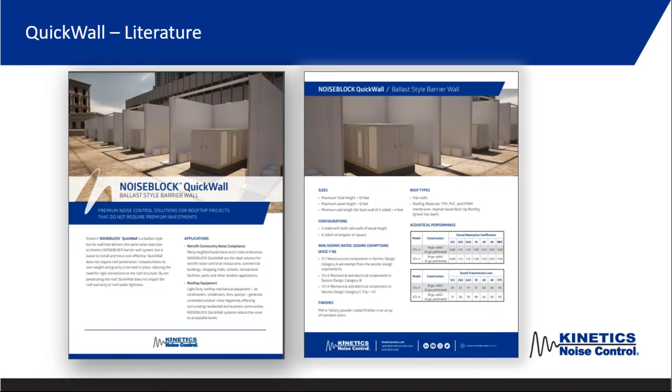So these are some screenshots from the video, some renderings of a project that we have planned to do. And you'll see there's a number of three-sided Noise Block barrier wall systems around some rooftop equipment, air handlers, light duty equipment. And there's some windows in the back here in an office building. So they're worried about the noise projecting from these units to that office building.

Now, we can do both three-sided systems or four-sided barrier wall systems. We're showing a three-sided here just so you can see what's going on inside, okay? We open up this wall here so you can see what's going on. So it is available in four-walled systems or three-walled systems. You'll see here the common components of a Noise Block barrier wall system.

You have your base plate plus column welded assembly. You have your 4-inch thick Noise Block wall panels, usually perforated inner shell for sound absorption and solid outer shell for sound blocking. So you get that composite noise reduction offered by the absorption and sound blocking. The only thing different here is you're going to see something low at the bottom, these little boxes. And that's where we talk about the ballast of a system.

So just looking at the QuickWall ballast, well, what is a ballast? A ballast is basically a heavy material placed low on a subject to improve its stability. And that's what we're doing here. As we said, you have your Noise Block panels, your structural steel. This is an example of a three-sided system, of course. And then you have your ballasts down here, which are basically weights.

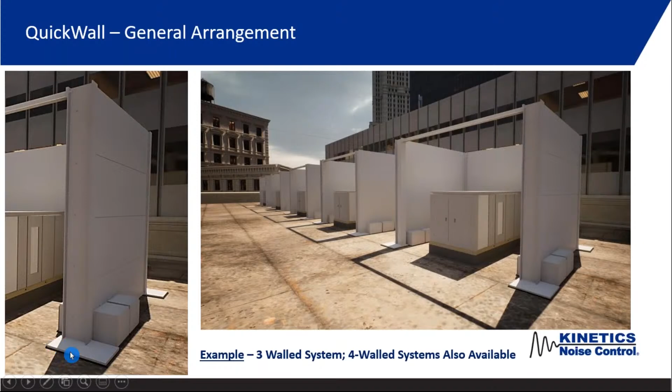We're going to determine how much force is there, how we have to overcome those forces, how many weights we need, and what is really feasible to be taken up, because this is also going to be weight on the roof. But the key here is, going to the previous slide, if you look here, there's no anchor bolts. So this is not rigidly attached to the roof structure. And that's the key here and what's going to reduce the costs.

When I talk about applications for this QuickWall product, I put in the right corner here, retrofit and new construction. The initial benefit is in retrofit applications, where there is equipment up on a roof. There's no problem, it's new construction. A year later, maybe somebody moves in next door and now there's a noise issue at the property line and we have to quiet this down. So just keep that in your mind from a retrofit perspective.

A lot of this presentation, some of the comments, features, and benefits, are going to be a function of being retrofit. Also, we can use it for new construction though. And once again, this is all for community noise compliance, rooftop systems, where it could be a restaurant, commercial buildings, schools, worship centers, anywhere where there could be an outdoor noise issue, and also for rooftop equipment, air conditioners, condensers, fans, pumps, anything making noise.

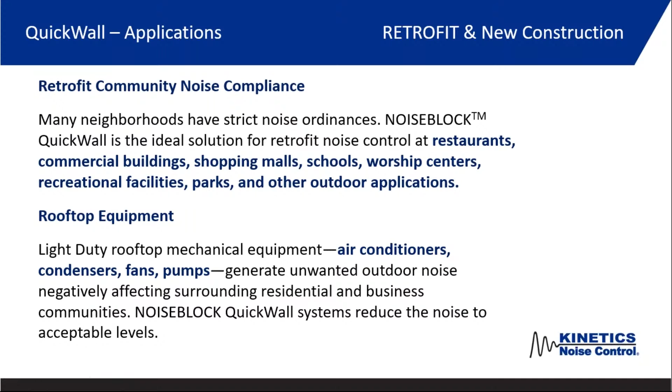So why is there... Hey John, we have a couple questions. Oh, I'm sorry. Great. Yeah, we didn't mention about questions at the end. So let's go ahead and answer them as we go.

That's great. Okay. Yeah, so the first question is, can we do one-side or two-side wall systems? Right now, we're doing three-sided and four-sided wall systems. We are looking at one and two-sided wall systems, and they should be able to be done. But right now, most of them have been three or four-sided. So I'd say the answer is yes, but we would want to look at the application.

Now, why is not rigidly connecting this to the roof a benefit? Well, one reason is, remember we were talking about retrofit. Maybe the equipment is already there, and we have a noise issue. We have an existing roof. We're going to eliminate the need for these roof penetrations using this system. So now we don't have to worry about any water leakages in the future. We don't have to worry about having to get under the existing roof to access if we have to rigidly tie a column into the system.

So those are all very important things and benefits of this. The other thing is it's not going to void a roof warranty. It's not going to interfere with the roof warranty. There's also shorter permitting processes when compared to systems rigidly attached to a roof structure. There's quicker installation. And then the other thing is, although we want all contractors to be very busy all the time, this actually would reduce the need for multiple contractors.

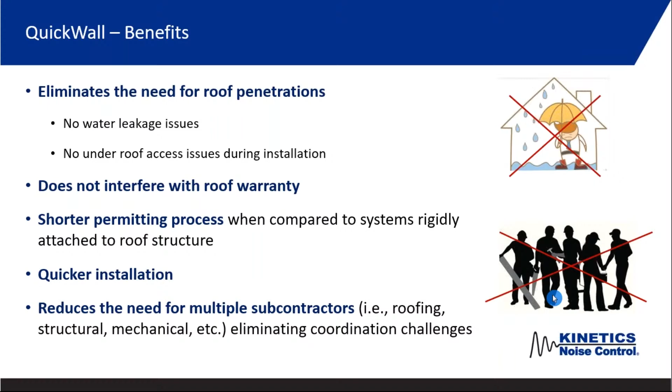If you don't have to penetrate the roof, we don't need a roofing contractor. If you don't need to rigidly tie to the existing roof structure, we don't need a structural contractor for this. We might not need a mechanical contractor, or we may only need a mechanical contractor. So now we're eliminating all these coordination challenges as well. So those are some very upfront benefits to this system, which basically floats on the roof. It's not rigidly connected.

QuickWall cost impacts. So what I mentioned on here is the initial cost is about the same for our standard noise block system. So our noise block system with structural steel base plate upward, you have our panels, you may have doors, you may have acoustic louvers. There's a lot of things that can also be installed in this as well. That system holds true in the same price. There's a little added cost due to the price of the ballast, because we're going to have to add these counterweights, if you want to call them, these ballasts to the system.

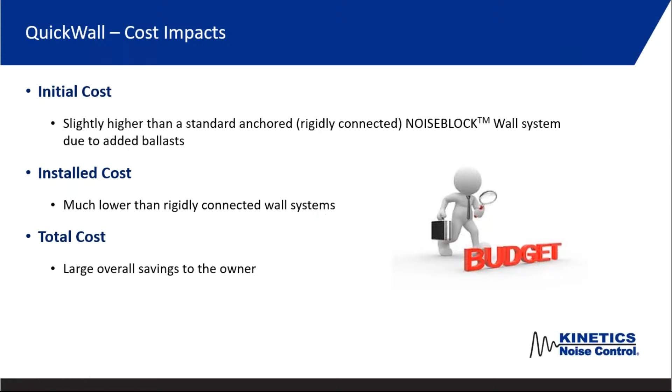So the initial cost might be slightly higher, but the installed costs are much lower than a rigidly connected system for a lot of the reasons, where we don't have to penetrate the roof, we don't need multiple contractors, we don't need to tie into the roof structure. So the total cost when you combine the two, there's a large overall savings to the owner, and that's what's really important with this.

Now, is this system applicable for all applications? The initial answer and the easy answer is no, not all applications would this be applicable to, but for many it is. And when we design this, there's a lot of things that are considered. One is we want to design it to resist any tipping due to wind forces and uplift forces, and the lateral movement, it skidding across the roof, right? And so we want to look at how many ballasts are needed, how much weight is needed to counteract those forces as they're designed into the system and the resulting forces. The added weight also provides additional friction.

And since there's no rigid support at the base plate, we also have a pad underneath that base plate as well. And so that's to protect the roof, and also keep these datum points, these heights of the ballast and the bottom of the base plates, at the same elevation.

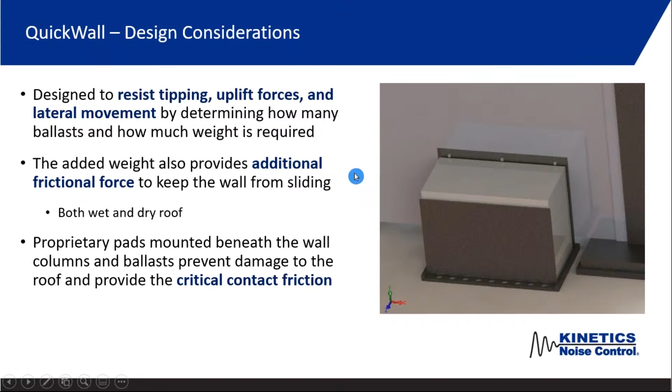But what we do is we counteract those forces. The pads are proprietary to give us a critical contact friction. And the other thing is that this is good for both wet and dry roof systems. So these are things we look at, because those are tests we have run in-house so that we have that all taken care of.

Would Kinetics provide all the components of the system, including structural steel and engineering? Yes, and that'll be in a deliverable slide that we have at the end, but correct. Kinetics would design everything from base plate upward, including the ballasts and the proprietary friction pads, whether this is powder coated or not, all the bolts, nuts, washers to hold the panels in place to the structural steel. So everything is connected together in one complete package, almost like an erector set. And that's the nice thing of this. There's no field welding, nothing like that.

Anything else? Would the weight of these ballasts introduce the need for modification to existing roof structure to handle the additional load? Yes, actually, you're going to find a point of limiting return. In other words, if you have, let's say, a huge wind force, 200-mile-per-hour gusts of wind, and we say, well, we can counterbalance anything. Well, before you know it, you get too many ballasts, too much vertical weight, dead load, and now your existing roof can't take that load anyway.

So that kind of goes back to what I had mentioned. It's not applicable for all systems, for all applications. But in some applications, even if it's reasonable and we have enough ballast, there will be some building structures where you might have to add some more structure to the building itself, separate of our system, just to hold the vertical weight of this. And we'll cover that in another slide as well.

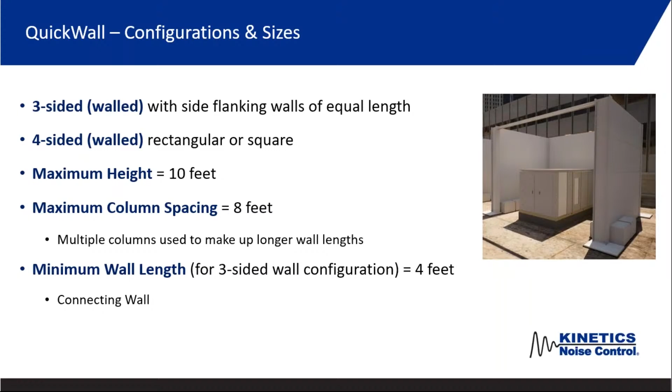And as you have an application, with Kinetics independent reps working with engineers, architects, owners, this will come back into the house here at Kinetics, and our structural engineers on staff will look at this to make sure it's applicable for your application and the site conditions.

A lot of people say, well, what are the applicable roofs? Any type of flat roofs right now. We are looking at roofs with a slope of maybe a quarter inch over a foot. They're not a flat roof, there's a slight slope, but those we believe we can handle. We think in the future we would be able to look at some form of a more sloped roof. But right now, figure flat roofs.

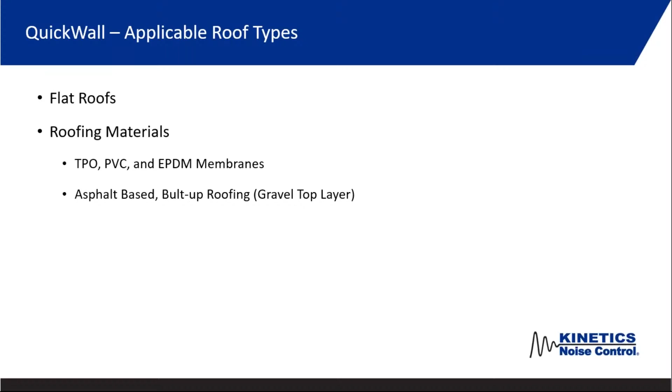Roofing material, all kinds of single membranes, whether it's TPO, PVC, EPDM membranes, no problem. And I think the biggest question that we get is, what about a built-up roof system with a gravel top layer? No problem. We have that covered as well. So this kind of goes with the limitations. They're not necessarily limitations. I think this should be limitations and clarifications.

If we look at the top line here, this was one of the questions that came in earlier in this presentation: older roofs may require additional roof structure to support the loads of the QuickWall system itself. So like we were saying, what if the existing roof of the building is not strong enough just to hold this and even mechanical equipment? Well, those are things where you might have to add some additional structural steel under the roof line.

And one example of this is pre-engineered metal buildings. They're great buildings, but very often they design those to the minimum requirement because they're not really meant to have stuff up on the roof as often. But usually it's pretty accessible to get underneath that roof and add additional structural support.

When you look at the wall height and lengths, they're all a function of the geographic location. Are we looking at a coastal location or an inland location? We want to look at the altitude of that location above sea level, and also the building roof height will be important. All this is taken into account by Kinetics structural engineering team.

The ballast quantity, like how many ballasts do we need? It's a function of the applied wind loads and the roof surface static coefficient of friction. So what's really interesting, this shows you here, it doesn't have to be one tier of ballast. It could be a multiple tier, double tier or triple tier of ballasts. So for higher wind loads, we add additional ballasts.

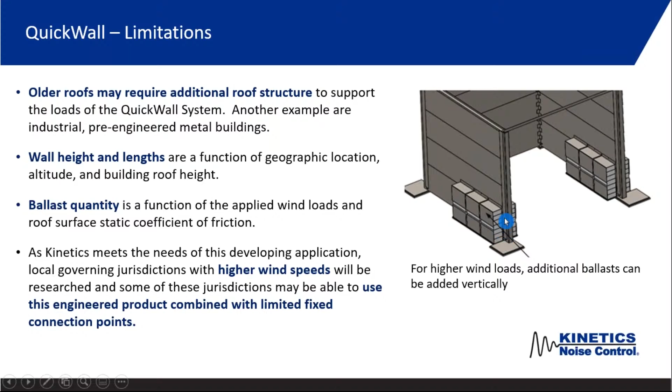They can vary in shape and size, and that's what we can do to see what is the best. How can we keep the lowest profile with these ballasts versus having to go two-tier? So the best thing is that it's a composite material. It comes in various sizes, and we can alter the size of the ballast itself.

When we look at the seismic exemptions, if your application is seismic design category A or seismic design category B with respect to equipment, or design category C with an importance factor of 1, this can be applicable. Now when we compare this, that is with respect to mechanical equipment. What about if you're looking at this from an architectural perspective? There is consistency with any architectural non-standard components, which this would fall under. So there's a good correlation there.

Now, when you look at the map here, a lot of people ask us, can I use it in my area? That's the first thing people want to know. So we wanted to put something here that gives you an idea of where you could use it right off the bat. If you look at the red areas, which are low seismic areas, I'm not going to say you can use it in all areas here, meaning that coastally, due to wind forces, we may need a lot more ballast than the roof can support, or we may need a combination of ballasts and rigid support.

But as you move inland to these red areas, you can use this product. So some of these areas are areas that you know right off the bat you should be able to use this product. The other thing you've got to be careful with is when you look in areas such as this that's red here, low seismic, but it's in a sandy area. So that's going to affect things. Even though it's up on a roof, it'll depend how things are classified. So if you have something more like quicksand, not quicksand, but softer soil and sandy conditions. So those are some of the things we looked at.

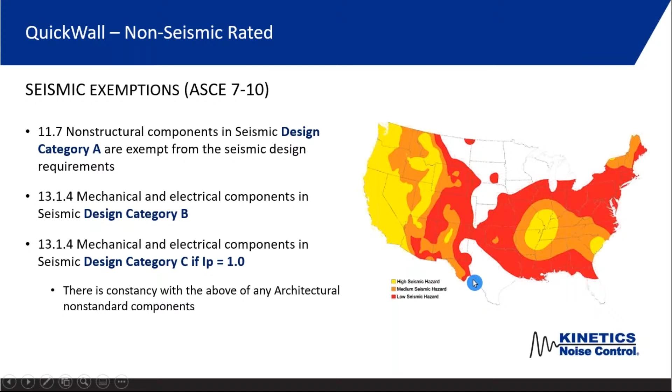You can also look at it in areas that aren't even classified, such as the white areas here in Texas and in Florida. But once again, you want to look at coastally, we might have to introduce a combination of rigid support and this ballast type.

Okay, so what is provided? So this gets back into the question that came up early on in the presentation as well. So just like Kinetics noise block barrier wall systems that are rigidly connected to buildings that people are used to, you get the structural support steel, the design and supply. So we do all the fabrication at our Kinetics facilities, and we do all the structural design here by Kinetics internal engineering, structural engineering staff.

You need PE stamped structural calculations by a structural engineer when required per locally adopted IBC. So we also can do some structural calculations. We can also have a mechanical engineer stamp it if that's applicable for an area, but we do have structural engineers on staff to cover this. Piece marked installation drawings: all the panels, all the columns, all the ballasts, everything comes piece marked with bills of material and on the assembly installation drawings. We also call those record drawings for file.

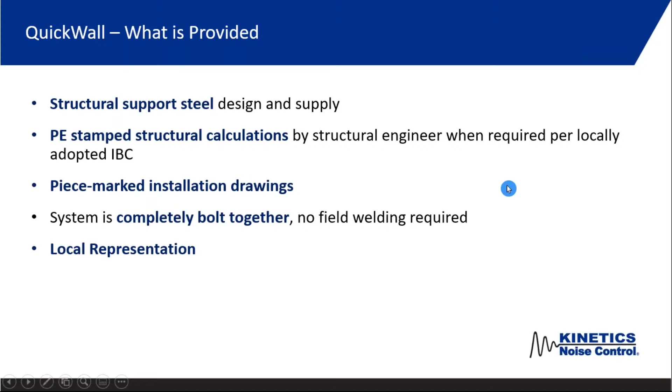Systems completely bolt together, no field welding. All the holes are pre-drilled in the factory. All the nuts, washers, and bolts are included to put the panels to column connections to structural connections. All the friction pads are in there and everything. And then we have our local representation with Kinetics, which is really nice. So we have people that can come out to the field. They can go over installation with you. They can come walk the site. All that is available.

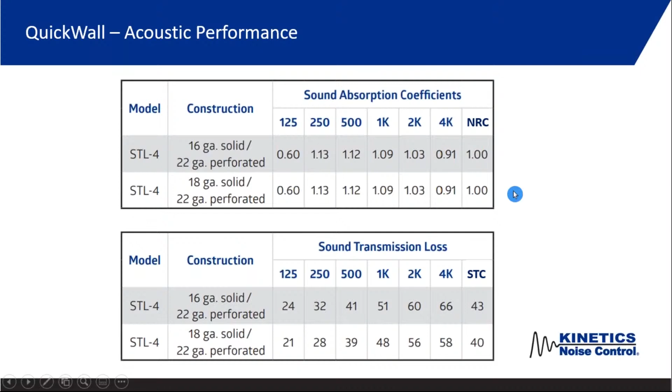When you want to look at the performance, this system is the same as a standard noise block barrier wall system, the acoustical performance. So all of our products are independently tested and backed per applicable ASTM standards, C423 for sound absorption and ASTM E90 for transmission loss. Often you're going to see these with a 16 gauge solid and 22 gauge perforated inner shell, or 18 gauge solid with a 22 gauge perforated inner shell. So we have all these available, and we can do solid too. We like to use a perforated inner shell because it helps reduce the noise levels before they can even impinge on the solid surface.

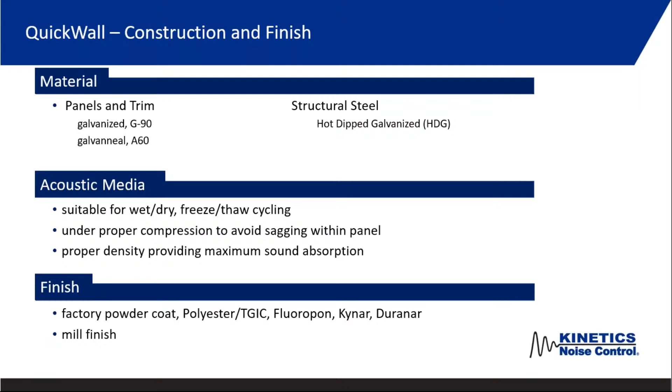So what are the benefits again of the system? It's not rigidly connected to the roof, no water leakage, no roof warranty issues. That's a huge cost savings to the owner and the engineer. Often this is going to be a retrofit application, but you can use it for new construction as well. The other thing is, is it applicable for all applications? No, but there's a lot of applications it is applicable for. So with that, I really don't have any more. I'm just happy that you're hearing about this product. It was a big need we had from the field for the last number of years. We've come up with a product, as Kinetics does with all our new product development.